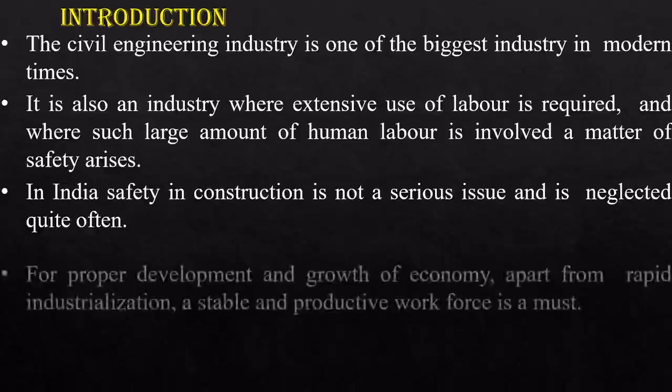In India, safety in construction is not taken seriously and is neglected quite often. For proper development and growth of economy, apart from rapid industrialization, a stable and productive workforce is a must. To build a productive workforce, it is essential that managements strive to meet the workers' social, psychological and welfare needs and take steps to humanize work and the work environment.

So what is the need for safety in construction industry? Because a large number of humans are involved in construction industry, we should assure the safety of human life. What is the need for this assurance? In order to improve the efficiency of the work produced.

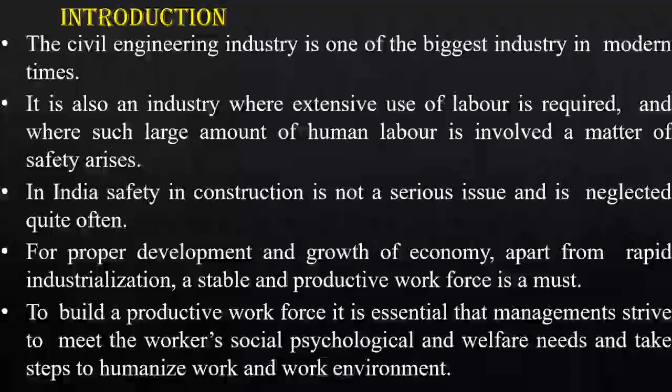Now, what is safety? Safety is a hard term to define because it is dependent on many factors. Very often, safety is adjudged in terms of an inverse relationship with the accident rate. High rate means low safety and vice versa.

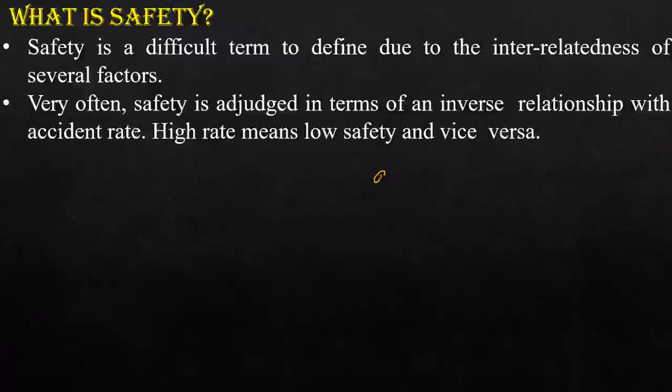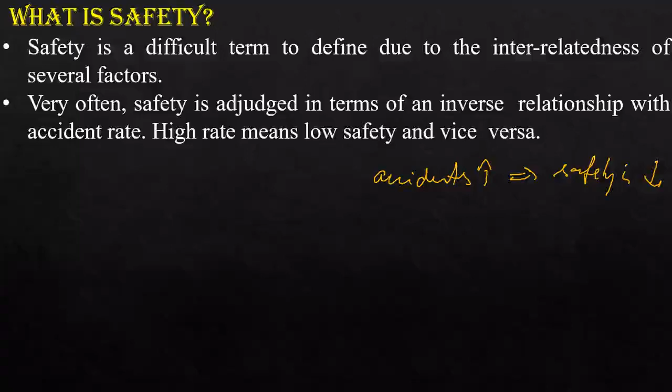So if accidents are more, which means safety is less. This is how we rate safety or define safety normally. But theoretically, safety would mean the absence of danger at work, which is made possible by eliminating hazards that create the danger.

So, what is safety? It is not the rate of increasing or decreasing accidents, but avoiding the danger, the absence of danger - that is safety. You cannot define safety in terms of percentages, like 1% chance of safety, 2% chance of safety, etc. It is the absence of danger, that is safety. It is 0% danger that is called safety.

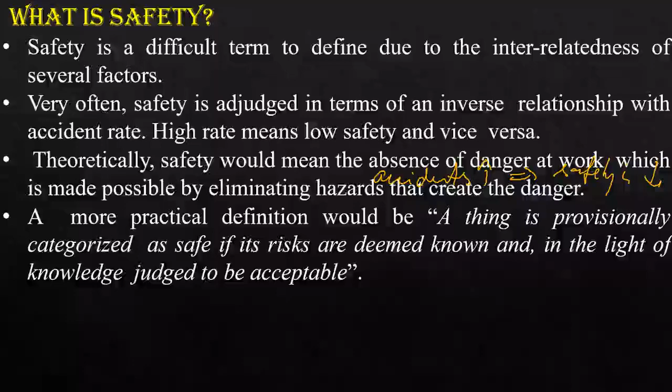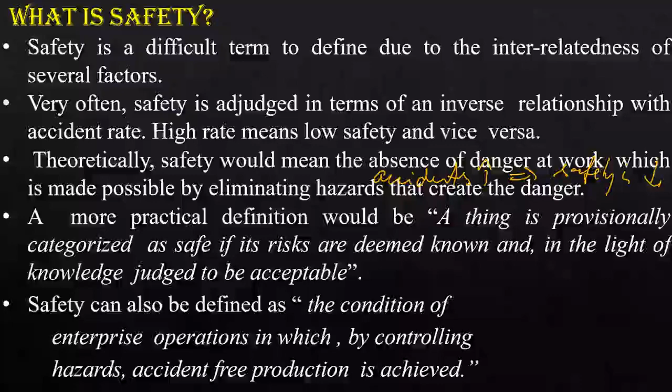A more practical definition would be: a thing is provisionally categorized as safe if its risks are deemed known and, in the light of knowledge, judged to be acceptable. Safety can also be defined as the condition of enterprise operations in which, by controlling hazards, accident-free production is achieved.

Now, why does the issue of safety arise? The issue of safety arises due to frequent accidents, and due to these frequent accidents there is a loss of labor, money, time and material.

All these are resources we use in the construction industry. So when there is a loss of any of the resources, then we need safety measures to protect these resources. We cannot waste or lose any of the resources, and the major one is human life.

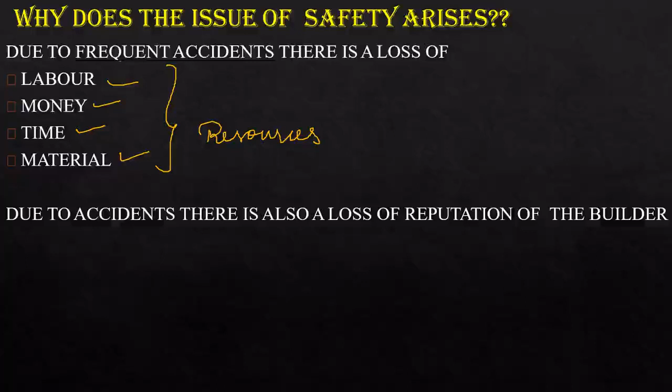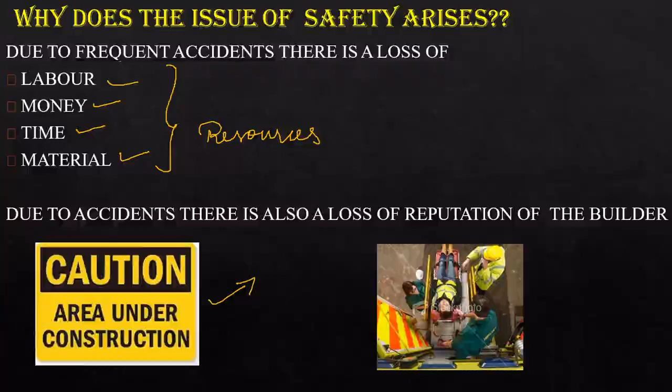Due to accidents, there is also a loss of reputation for the builder. This is why you often see caution signs at areas under construction, because construction areas are considered non-safe areas. We use the word caution because there is a high chance of accidents occurring.

Now, accidents. One of the dangers we face in the construction industry is accidents. Accidents are readily recognized when there is damage to properties and someone is injured. Generally, an accident is defined as an event which is unexpected or the cause of which is unforeseen, or it can also be defined as any occurrence that interrupts normal work.

What is an accident? We cannot predict accidents, it just happens, right? However, it is not always easy to determine to what extent accidents are the direct result of the working environment only. There may be a lack of proper safety equipment at the work site. Long working hours may cause fatigue, improper living conditions and improper working conditions.

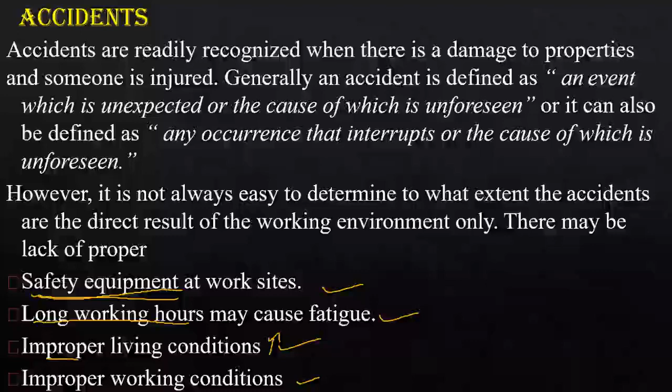So you should provide safety equipment at the work site. No life should be lost. Long working hours should be avoided because it makes you tired and fatigued, and reduces the efficiency of your work. The living conditions of workers should be improved, and a proper working environment should be provided in order to have high efficiency.

It is for these reasons that safety, occupational health, working conditions and welfare are bracketed together for evolving measures of accidents control as well as of promoting safety. It may be underlined that in construction, the concern for safety is for both persons and property structures.

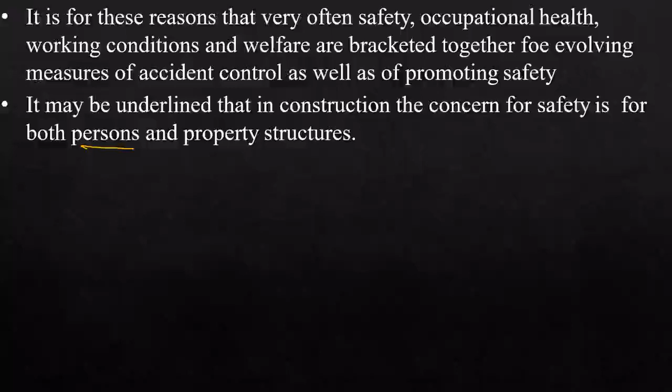The risk of accidents is present in all everyday activities, and it is not fair to pretend that a work site can be entirely free from accidents. However, in a more practical way, a construction site is considered safe when persons can go about their normal work without undue risk. So for construction work, they should be able to do the work without any risk. They should feel safe. It should be safe.

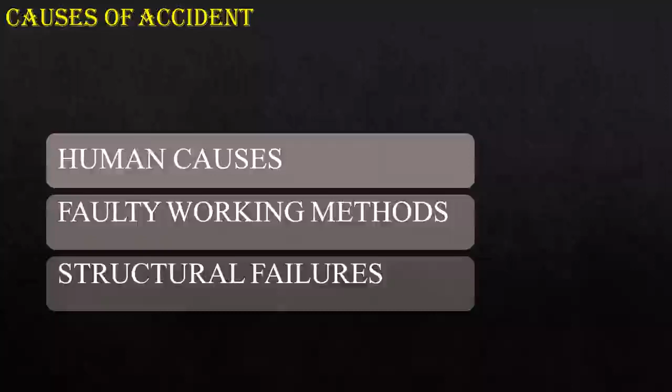What are the causes of accidents? Accidents in the construction industry can occur due to human causes, faulty working methods, and structural failures.

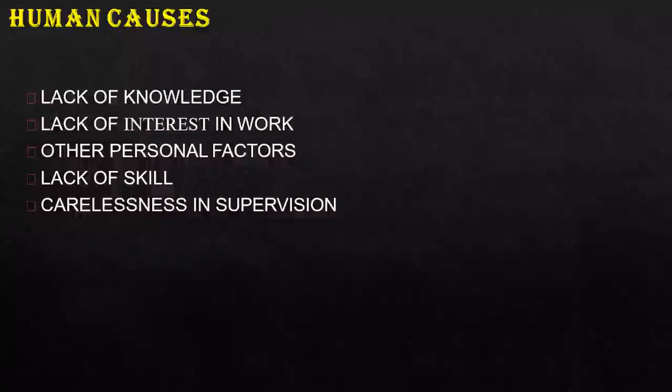What are the human causes? These may be due to lack of knowledge, lack of interest in work, other personal factors, lack of skill, and carelessness in supervision.

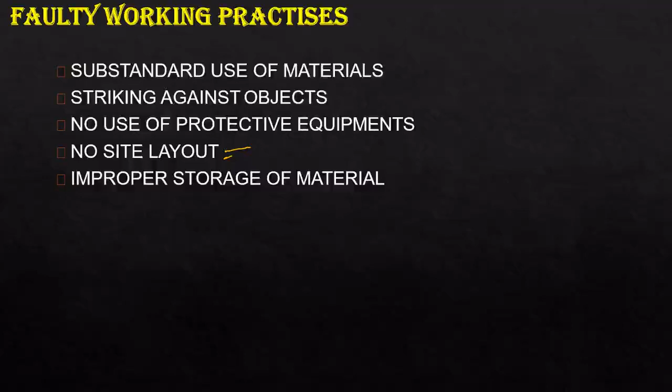The faulty working practices include substandard use of materials, striking against objects, no use of protective equipment—because sometimes people avoid using protective equipment—working without a proper site layout, so you don't know what is happening nearby and whether it is dangerous, and improper storage of material.

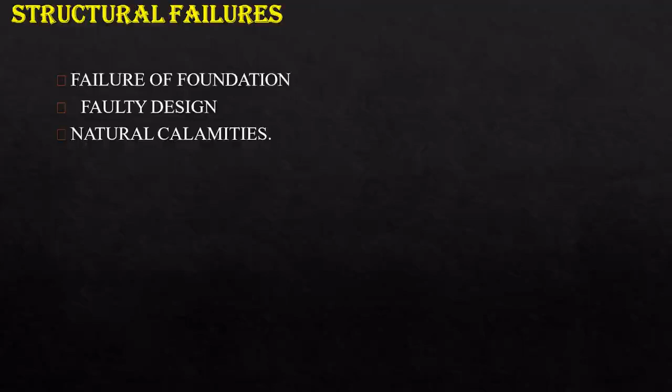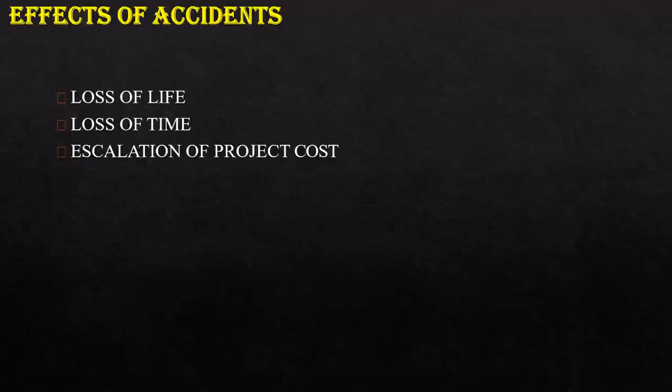Structural failures include failure of a foundation, maybe due to faulty design, and due to natural calamities. As a result of accidents, it leads to loss of life, loss of time, and escalation of project cost.

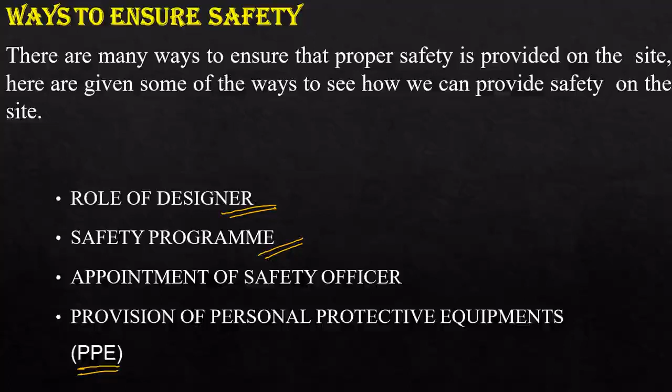And PPE kits, that is provision of personal protective equipment. We are well aware of this term nowadays, PPE kits, right? So that means personal protective equipment, and here it relates to the construction industry.

Now, what can be the role of a designer? In the development of a project, a significant role is played initially by the designer of the project and then by the constructor of the project. Construction worker safety has often been regarded as the sole responsibility of the construction contractor, but it is the duty of the designer as well as the constructor.

So despite the obvious reasons for placing the primary responsibility on the contractor, the safety performance on a project may well be dictated to a large extent by the decisions made by the designer, which means proper design. The designer, while designing the building, may design it in such a manner that it becomes easy and safe for the construction of the higher parts of the structure.

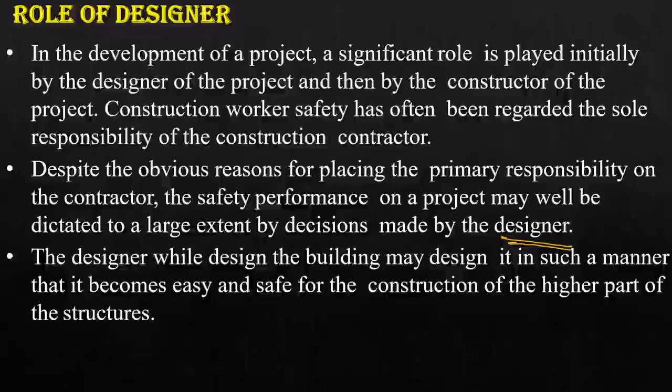Normally in the construction industry, the chances of accidents are more in high-rise buildings when working at greater heights. So you can do the design in an easy and safe manner, with safe design details, so that you can avoid accidents.

Now, what is a safety program? How to create awareness? Most of the accidents that take place are mostly due to lack of knowledge and skill of the workers and the supervisor. This can be improved by holding safety training camps for the whole site staff and workers. Especially trained personnel should be hired to hold safety camps.

Whenever recruiting a new worker, their experience should be checked and adequate knowledge of the work should be given to them. And a record of all the accidents that took place should be kept so that there is no repetition of the same accidents again and again.

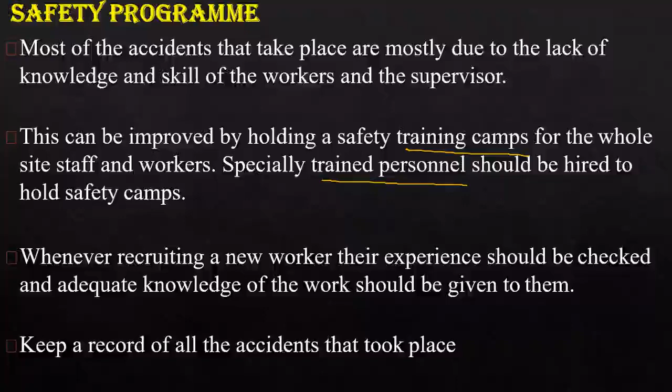Now, what is the role of a safety officer? A safety officer should be specially appointed to take care of all the safety related issues of the construction site, and appointing such an officer helps in keeping the health and safety of the staff under close watch.

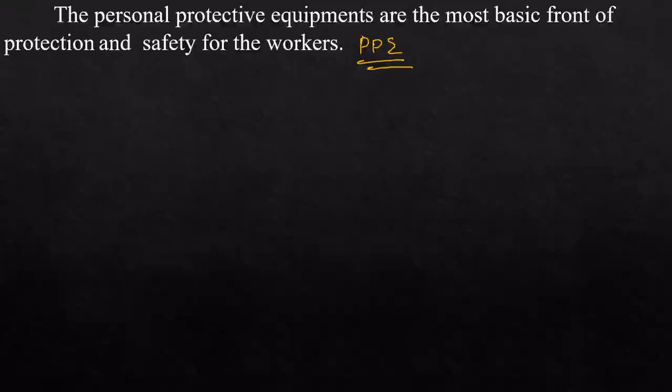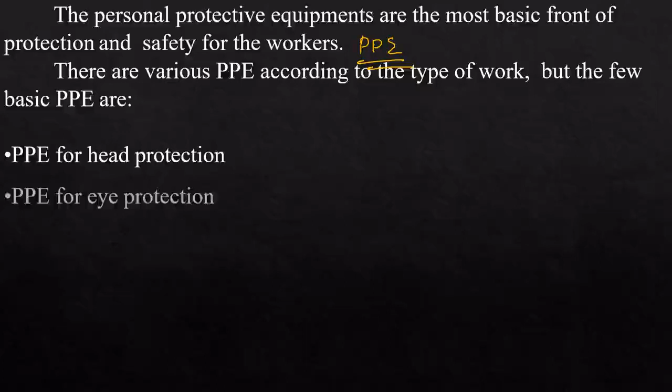Now, personal protective equipment, that is PPE. These are the most basic front of protection for the safety of the workers. There are various PPEs according to the type of work, but a few basic PPEs used in the construction industry are for head protection, eye protection, ear protection, hand protection, work on higher floors, and respirators.

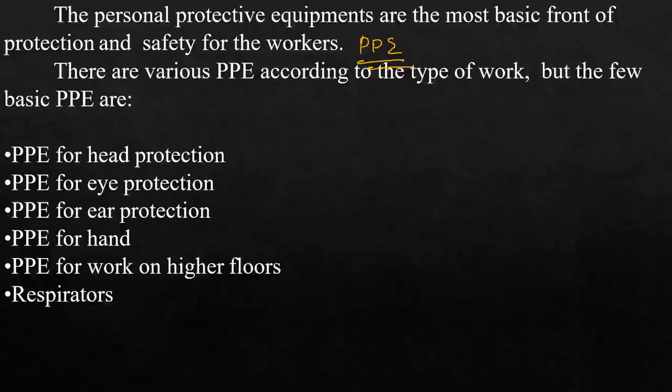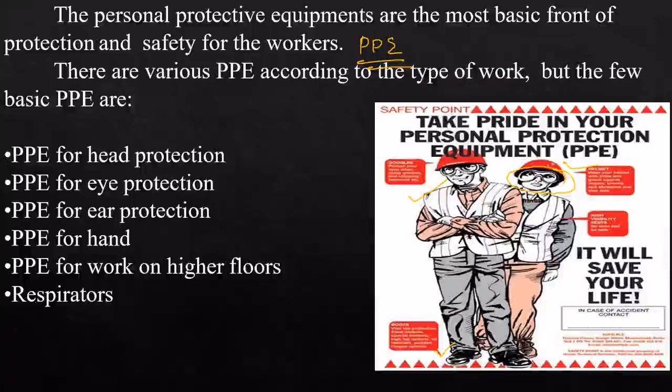Here you can see different PPE for head protectors, leg protectors, head protectors, eye protectors, etc. Just a diagram or figure showing the different PPEs.

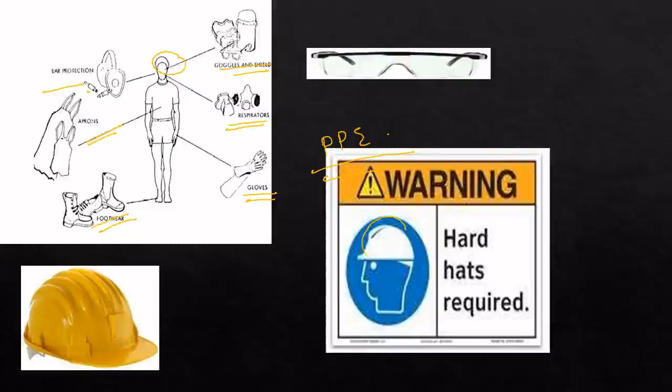Hard hats required. Showing some of the PPEs which we use in the construction industry, and some of the safety measures while working in the construction industry.

Now let us see the Indian standards for safety in construction. In India we have SP 70: 2001 Handbook on Construction Safety Practices. This is available on the website. You can download it and go through it to understand the Indian standards for safety in construction, and see whether the construction industry is using all these safety measures. This handbook gives us information about the safety requirements in India, the Indian standards.

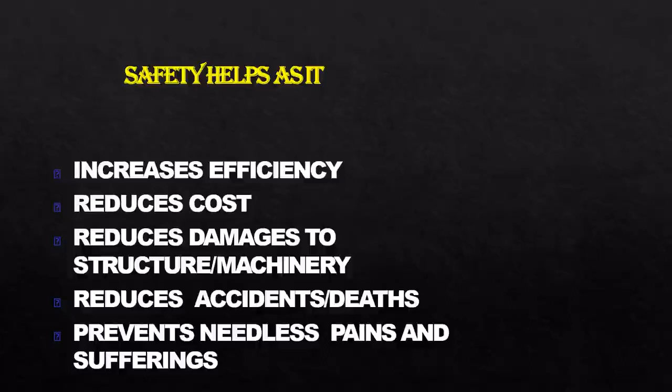So why is safety important? Safety helps as it increases efficiency, reduces cost, reduces damages to structures and machinery, reduces accidents and deaths, and prevents needless pain and suffering.

Safety in construction, for a structure, refers to structural safety, fire safety, environmental safety, workers' safety, public safety, and engineers' or contractors' safety.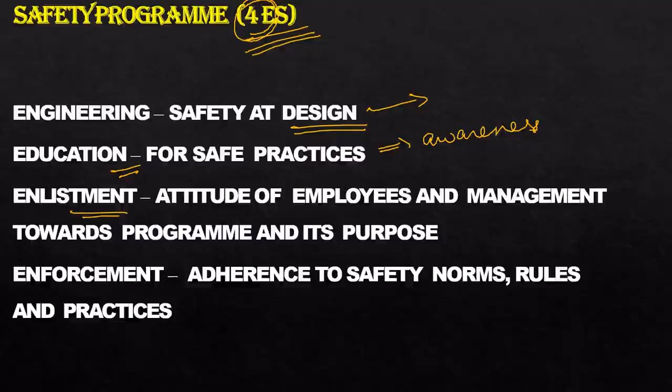Now the safety program has 4 E's. The 4E safety program refers to: Engineering, which is safety at the design stage, the role of a design engineer, ensuring safety at the designing stage. Then Education for safety practices, creating awareness among workers. Then Enlistment, the attitude of employees and management towards the program and its purpose. Then Enforcement, making it a practice - adherence to safety norms, rules and practices.

So the need for safety in construction: the first one is skills development, because if your construction site or design is safe, the first advantage you can gain is skills development.

If your worker has confidence that he is safe, he can think positive - thinking positive, good engineering practices, systematic thinking, financial language will be improved, communication can be improved. So there will be some creativity and initiative in your work, and problem solving skills will be developed.

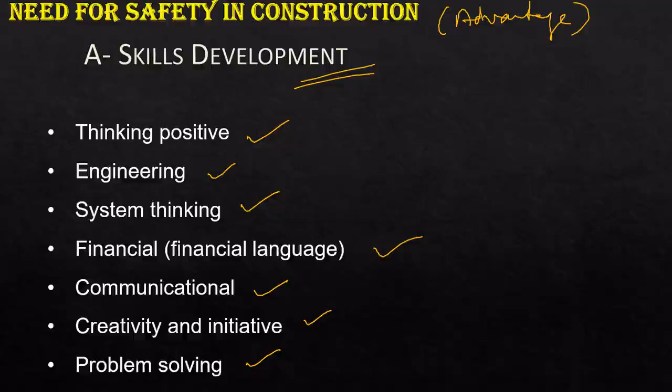And safety is not a cost, but an investment. If you provide more safety, it will result in more efficient and good work.

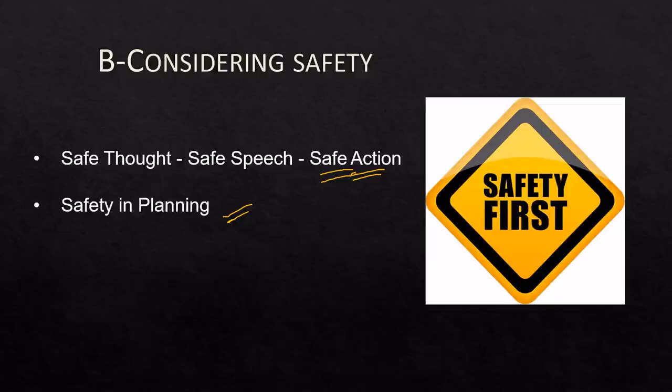Then the second need is considering safety for safe thought, safe speech and safe action, and safety in planning. So safety is first.

Here you can see the degree of change versus time. These are the stages of construction: planning, design and construction. The degree of change is high at the planning stage - if you need to make changes, you can do it easily. At the design stage the chance is lesser than the planning stage, and in the construction stage it is very less. So the ability to make changes is more at the planning stage, and it decreases, being least at the construction stage.

And the cost of making these changes will be less at the planning stage, and will cost more at the construction stage, because at this stage you have to change your plan, your design, and your construction. So the cost of making changes increases as time goes on.

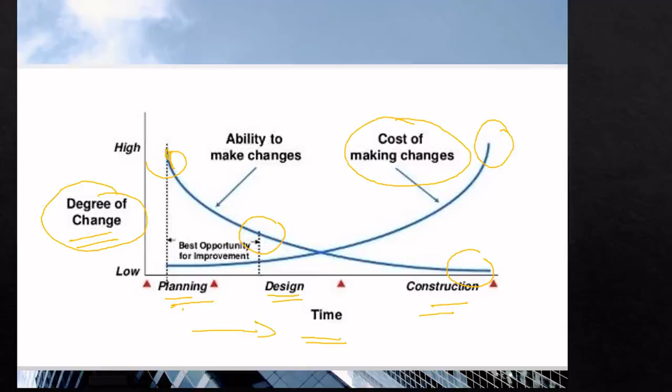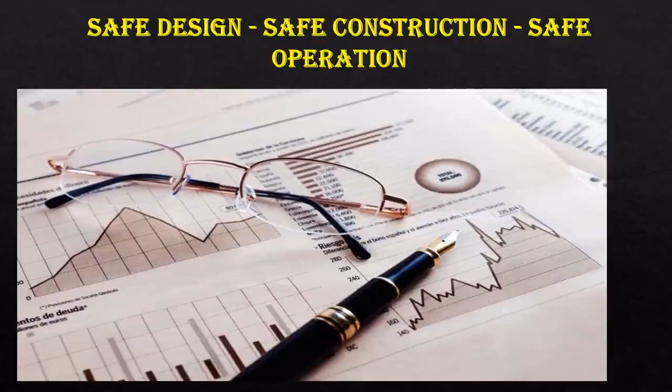This is just to ensure we need safe operation in the construction industry. Create a competitive advantage with safety. We can go competitive, we can develop big projects, high-rise projects, but ensure the safety.

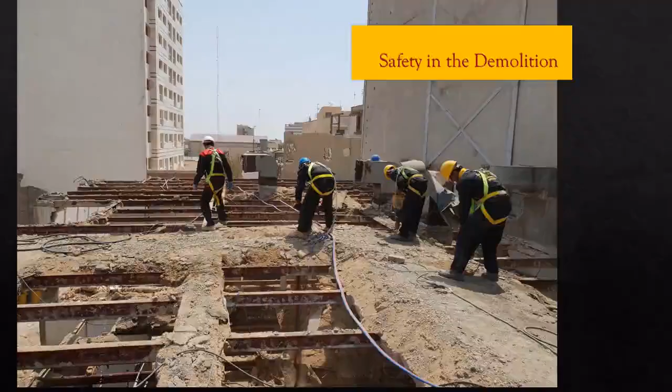While demolishing a construction, safety should be ensured. While erection process, safety should be ensured. During scaffolding, safety should be ensured. Now we will see some of the safety tips in construction sites.

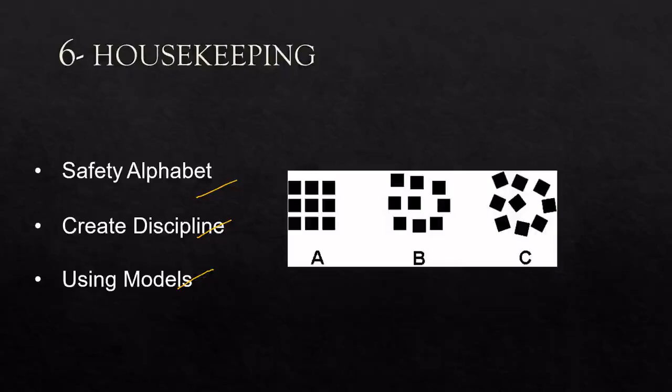The sixth is housekeeping. Housekeeping is proper arrangements, proper things in proper place - safety alphabet, create discipline and using models. You can see here A, B, C: A is a good example of housekeeping, B is somewhat arranged, and C is badly arranged. This is how materials should be arranged in the construction industry.

This can be explained by the broken window theory. If you see a broken window, it's highly complicated and not good, right? So lack of management, lack of organization, dirty places, weak infrastructure and waste, similar to a broken window, results in crime and misbehaviors in the construction industry.

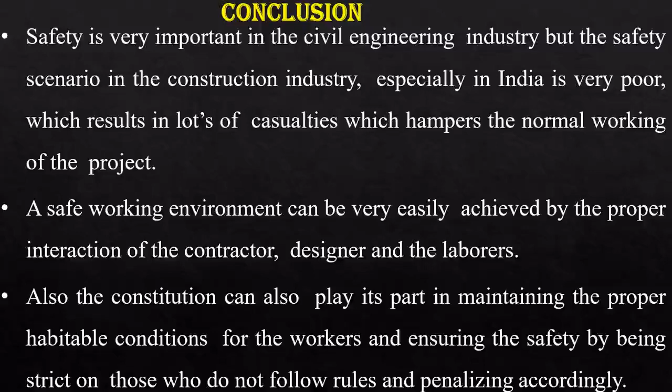In conclusion, safety is very important in the civil engineering industry, but the safety scenario in the construction industry, especially in India, is very poor, resulting in a lot of casualties which hamper the normal working of the project. A safe working environment can be easily achieved by proper interaction of the contractor, designer and laborers. The constitution can also play its part in maintaining proper habitable conditions for workers and ensuring safety by being strict on those who do not follow rules and penalizing accordingly. Unless all these factors work together, accidents will keep occurring and safety will be compromised.